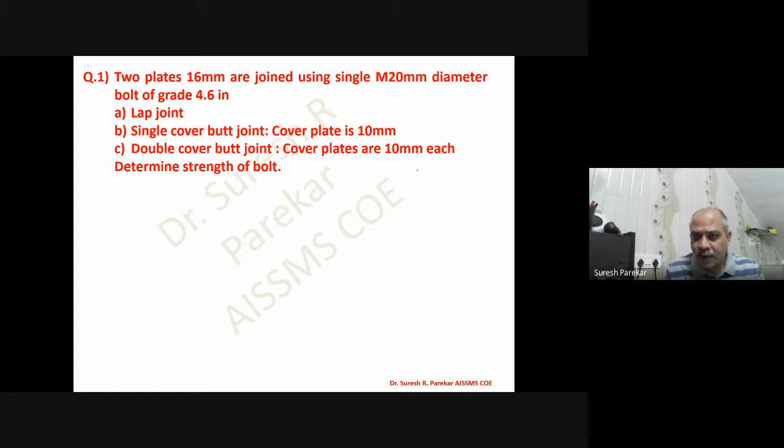So now let's see how we get it. We write 1 upon 100 into Fu equals the first digit, or the digit before the decimal, and from this we get Fu equal to 400 MPa. Then 1/10 of Fy equals the multiplication of these two values, and from which we get Fy equal to 240 MPa.

Now if you have grade 10.9, then 1/100 of Fu equals 10, and from this we get Fu equal to 1000 MPa. And 1/10 of Fy equals 10 into 9, and we get Fy equal to 900 MPa.

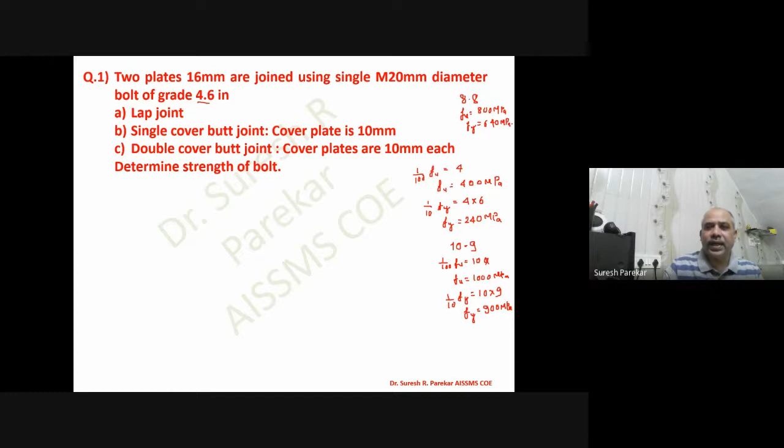So likewise, we are going to get this value of Fu and Fy for different classes of grade. Now if we have 8.8, I can directly write it: Fu we have the first value which is 800, and Fy we have multiplication of the two multiplied by 10, which will be 640. So likewise we can calculate the values of Fy and Fu.

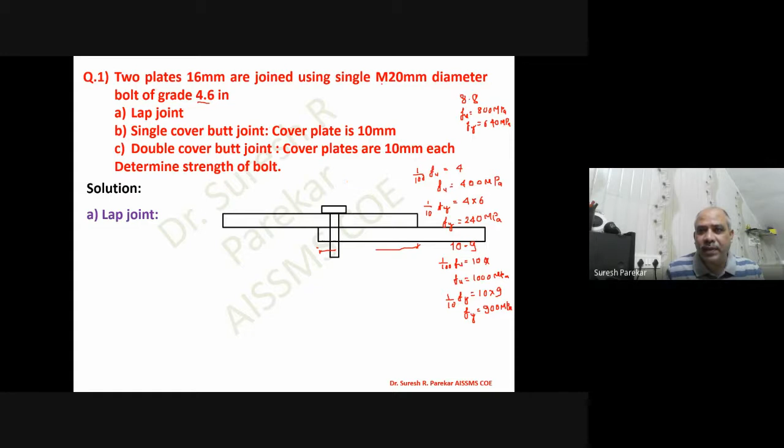Now you can see for a lap joint, we have one plate over the other, and we have this as lap joint. We have seen the criteria for this, that is 4 into size of the lap length, we have 40 millimeter minimum. Now we can have this joint using a single M20 bolt, and then we have to find out and determine the strength of the bolt.

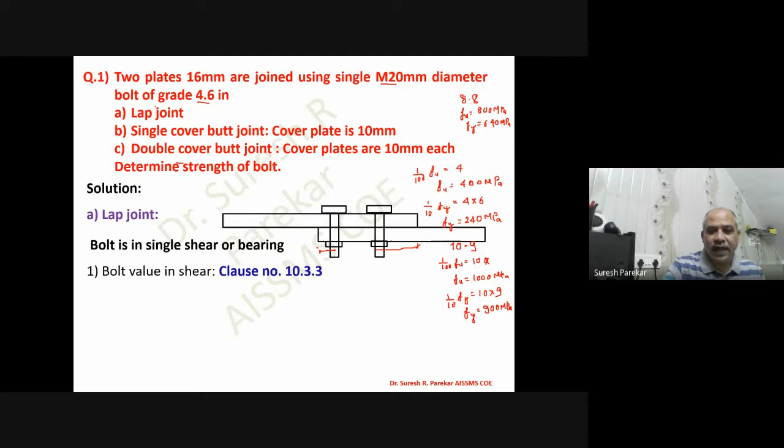Now we will go by the formula we know. So we have this formula for bolts in single shear. We are going to get this bolt value in single shear or bearing, and then we have the bolt value in shear. Now if you remember, we have formula FUB upon root 3 gamma MB into A and B, which is VDSB. And from this, if we substitute these values, we are going to get this value.

Now we have taken this A and B, assuming that failure is in the threads, assuming failure in threads, and this failure is single shear.

And then we see A and B, we have taken 0.78 into pi by 4 into 20 square. What is our formula? If I write VDSB, we have FUB upon root 3 gamma MB into NN ANB plus NS ASB. Now this is 0 because we have single failure and value of NN is 1. And therefore we get VDSB equal to 400 upon root 3 into 1.25 into 245.04. So we have strength of bolt, we have 45.27 kilonewton.

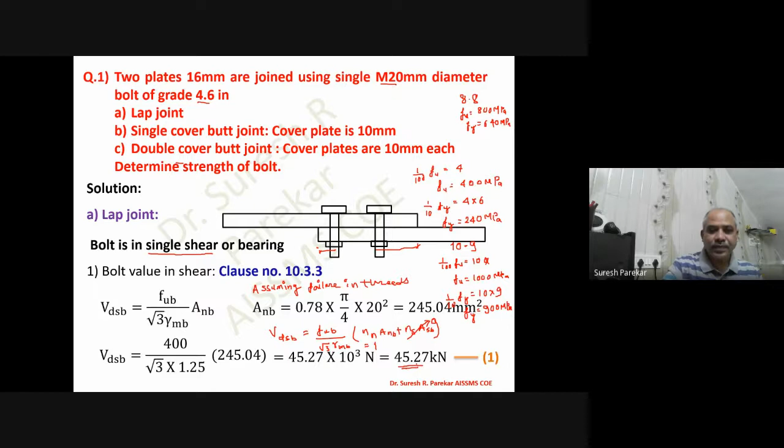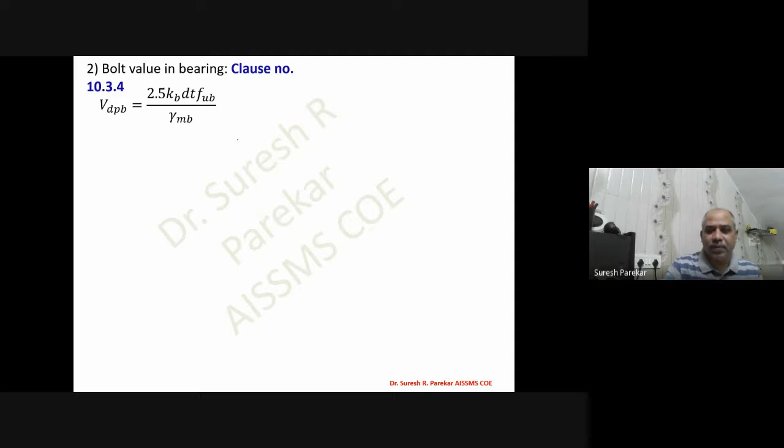So this is the first one. Now we will go to the second, bolt value in bearing. So we have this formula, VDPB equals 2.5 kb dt FUB upon gamma MB. Now kb is the smaller of these. We know we have 4 terms: E upon 3D naught, P upon 3D naught minus 0.25, FUB upon FU, and 1, and we have to take the lesser of the 4.

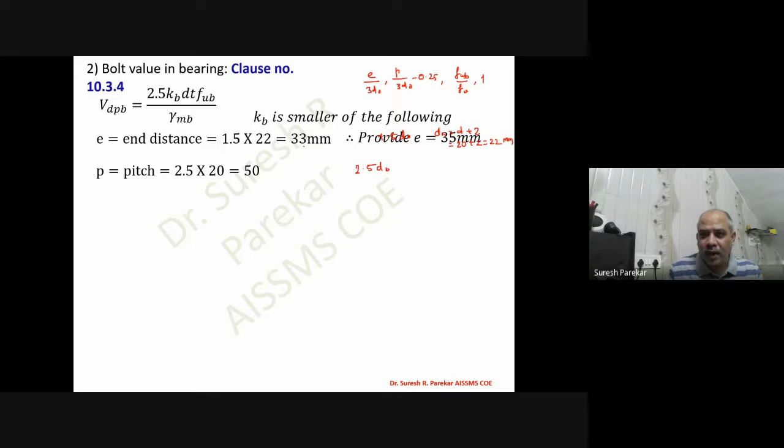So end distance, that is 1.5 into diameter of hole. So this is 1.5 DH, and DH equal to D plus 2, because we have 20 plus 2, and that is 22 millimeters. So we will get end distance 33 millimeter, and we will assume it as 35 millimeters. Then pitch, 2.5D minimum pitch we have, this minimum pitch is 2.5 into diameter of bolt. Here diameter of hole and here diameter of bolt. And then we will assume pitch as 60 millimeters.

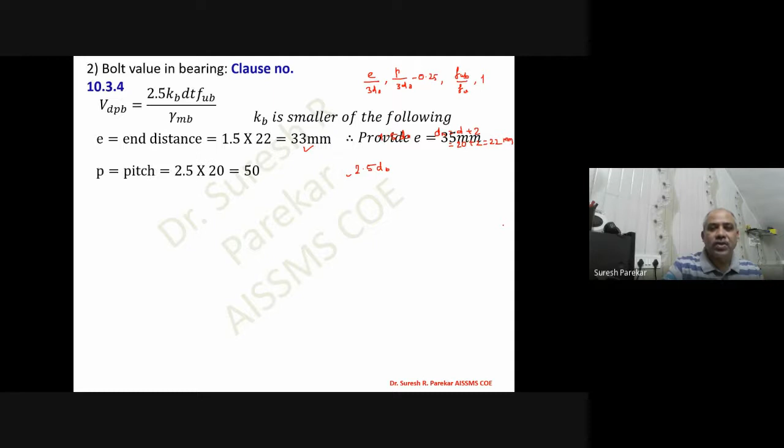Then the first criteria gives 0.53, second criteria gives 0.66, third 0.98, fourth 1. So KB we have 0.53. And then we will put the values. Now T we know, in the direction of stress we have to consider. We have these two plates and these are 16 millimeters, so my value of T is 16 millimeter. So you can see this, into 16, and we will get 135.98 kilonewton.

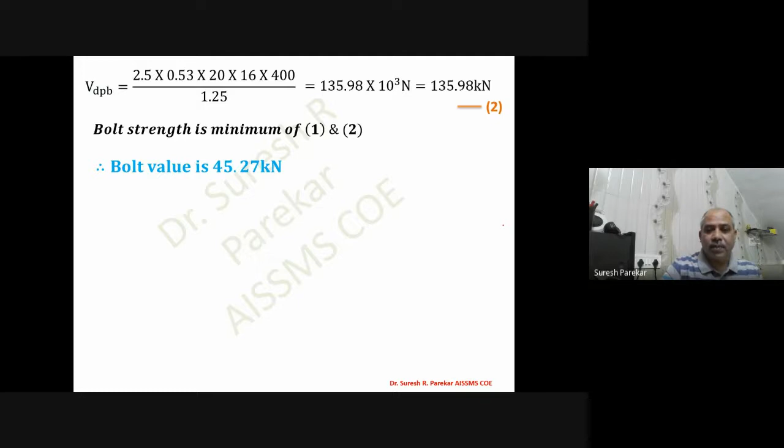Minimum of the two is considered as the bolt strength, and we have bolt value 45.27 kilonewton when we have a lap joint and a single bolt line. Then we have single cover butt joint. So we have bolt value in shear. Now we are proceeding in this fashion.

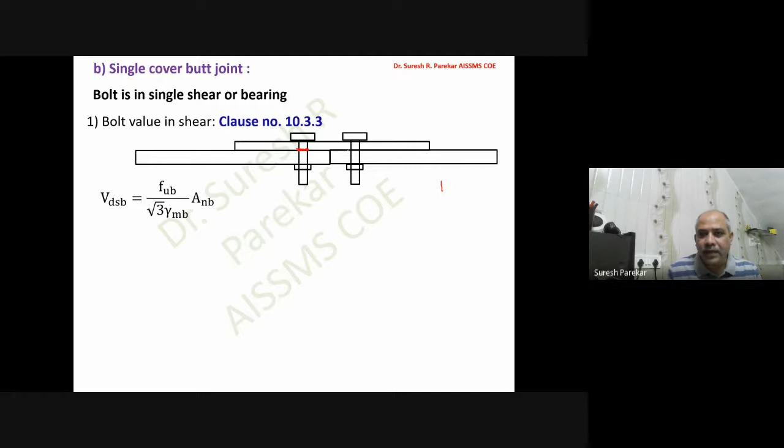So now we will have VDSB. Again we have single shear only. Now how will we decide this? When the bolt fails in this case, we get failure of the bolt at one plane only, and therefore it is single shear failure. This part of the bolt will be with this plate and this part will be with this plate.

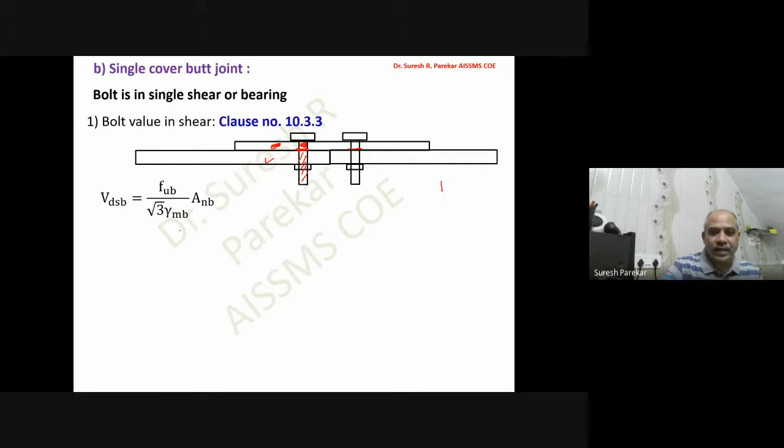So it fails at one plane only, single shear failure, in the same fashion. If we substitute these values, we will get the same 45.27 kilonewton. Now if we go to bearing, here we have the same end distance and the same pitch.

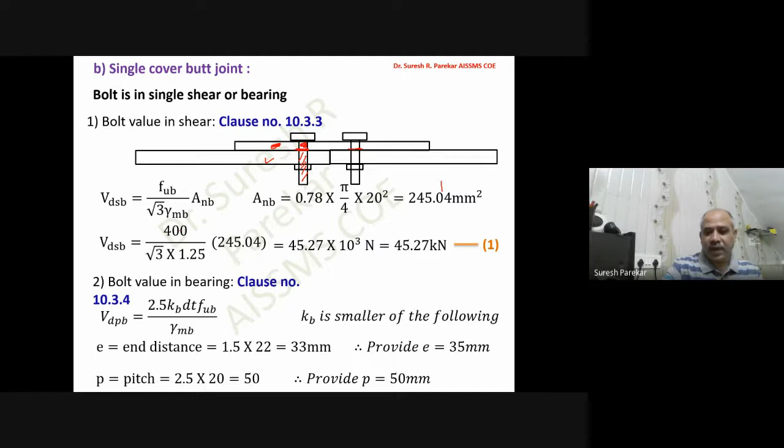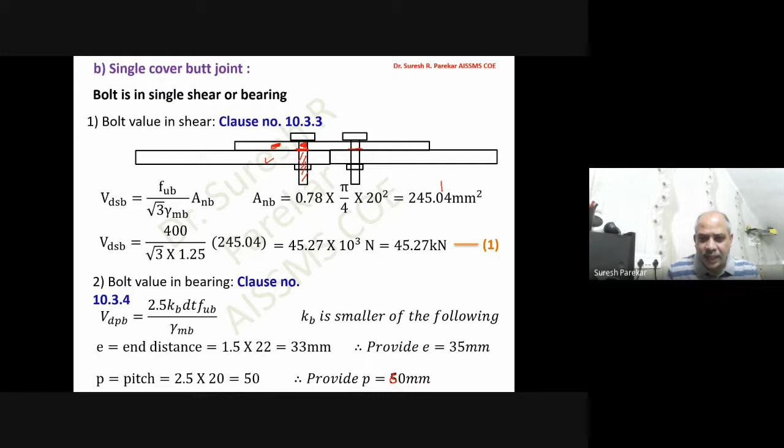Here we have considered P as 60 millimeters, not 50. We have this value of P as 60 millimeters. We are assuming this is the minimum criteria and you have to provide more than this. With these values, from this we get the bearing value as 84.8 kilonewton.

Now you can see this, here we have 10 as minimum. So minimum we have to consider, and minimum we have 10 millimeter in this case. Now how will we get this? Try to understand this.

If we consider this butt joint, we have a plate, and below this plate we have two plates. When you apply force to this, this plate goes on this side. In the direction of stress, on one side we have 10 millimeter, and on another side we have 16 millimeter. We have to take the minimum of the two, so our value is 10 millimeter, and we get 84.8 kilonewton.

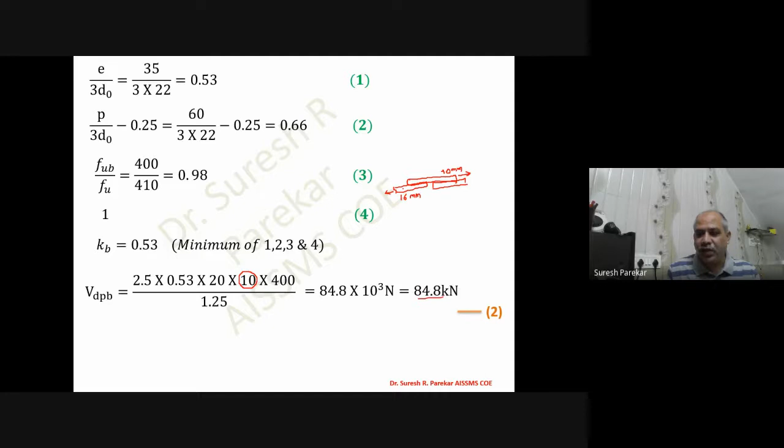Then also minimum we again have 45.27 kilonewton only. Now this is the most important one.

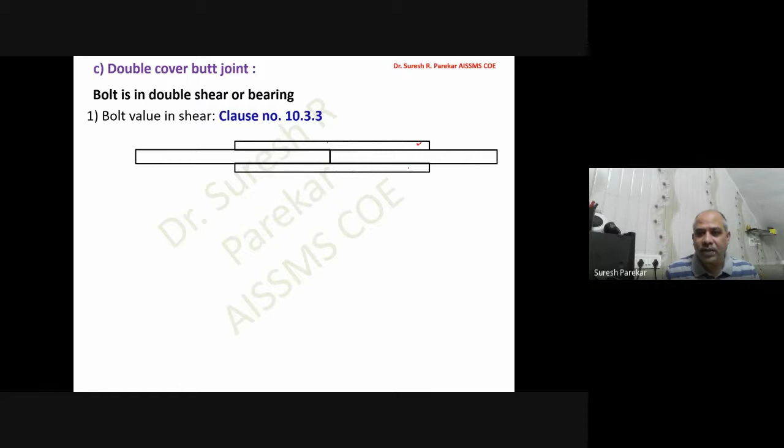Here you can see we have cover plates on both sides. On this side also we have one plate, and on this side too. In this case, if you see the failure of the bolt, this portion will go with this plate, then this portion will go with this plate, and this portion will go with this plate. So my bolt will fail at this plane, and my bolt will fail at this other plane.

So we can see it very clearly, this is one plane where we have failure, and this is another plane where we have failure. So this bolt will be divided into three parts, but we have failure at only two planes. This is one, two, and three parts, with failure plane 1 and failure plane 2. So we have double shear.

Now when you apply stress to this, if this plate goes on this side, then these two plates will go on this side. This will try to go here if I apply force, so these two will be on this side. This plate will not affect this. And therefore I have 10 millimeter on this side plus 10 millimeter.

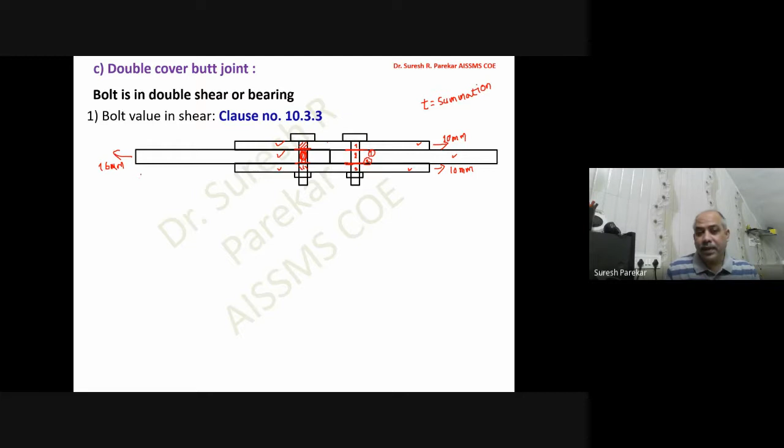If you see the IS code, they say to take the summation of the plate thickness in the direction of the stress. So we have here 20 and here we have 16, and therefore we have to take the bearing value of T as 16 mm, not 20 mm.

And now here we have double shear, so you can see this, we have n times n, A and B, plus n times S. Here we have nS, ASB, that is shank, and this is thread. And this A and B we know as 0.78 into ASB.

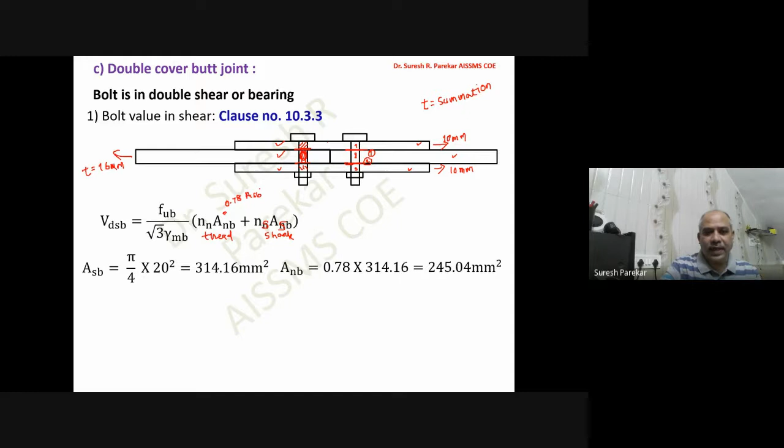And then you substitute the values. So we have ASB, A and B, and if we substitute this, we get the value 103.31 kilonewtons. This value, if you see, in single shear it was around 45, so it will go double, more than double of your single shear value, that is 103.31 kilonewton.

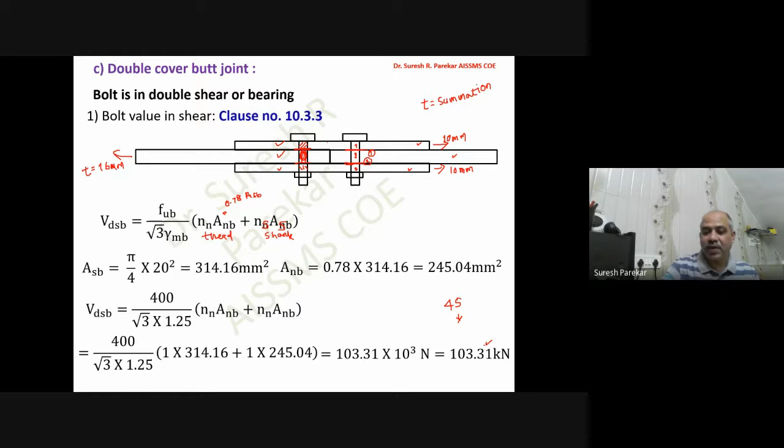Now if we go to the double shear bolt value in bearing, these values are the same first. So again we have a pitch of 60 millimeter. You can take 50 also, so why have I taken more than this? Because we have this as 0.53, and if you take it less, it may come out lesser. So try to provide a pitch greater than your minimum requirement.

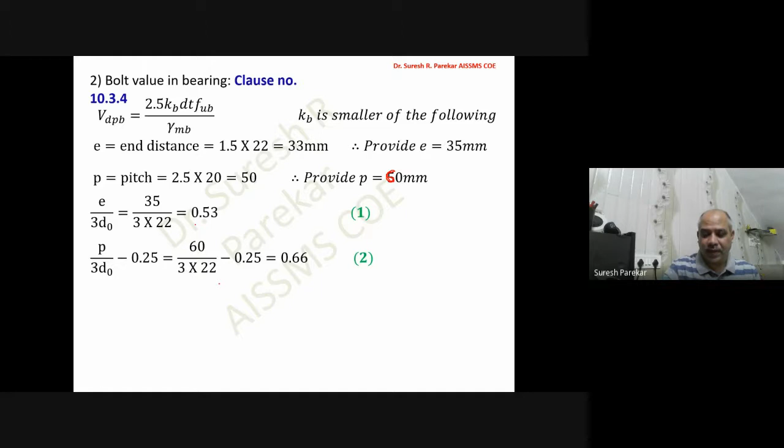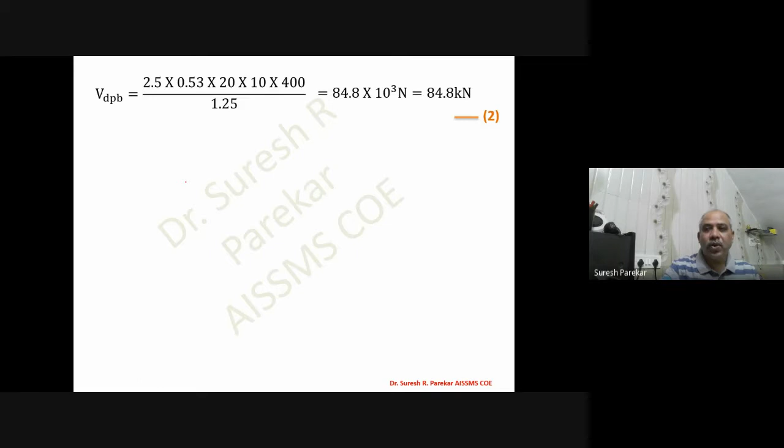Then 0.98 kb we get as 0.53, and VDPB if you see we have 84.8 kilonewtons. We have the value of VDPB, and then we take the minimum of the two. So we have the first value as 103, and the second value as 84.8 kilonewton, and minimum of the two we have, that is the bolt value, 84.8 kilonewton.

So this is about the problems which are related with bolted connections.